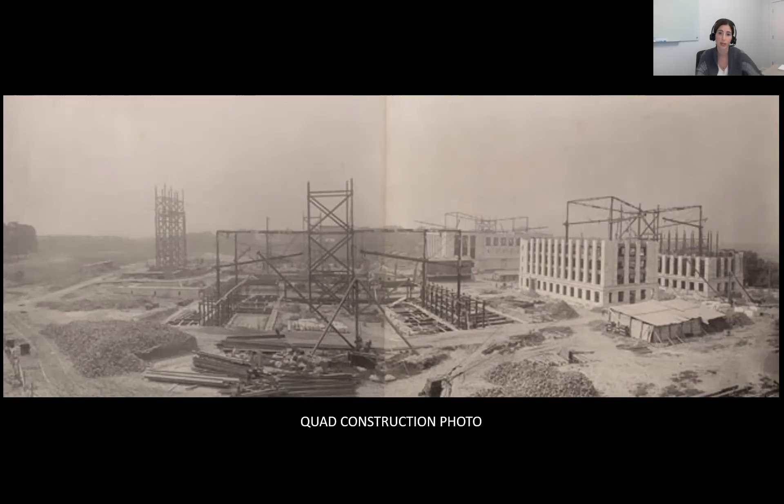All 5 buildings consist of thick marble and brick masonry exterior bearing walls, with steel frame that you can see in these images as the interior makeup. So the steel framing is supported on exterior steel columns as well that are clad in brick, and then the final cladding is marble. The stone cladding is a Vermont marble of the Dorset Plateau Quarry, and that will be of interest in coming slides.

So Gordon Hall is the flagship building at the head of the quad. The building has large porticos on the north and south elevations, each supported by 6 large marble-clad columns. The buildings were originally designed with exposed brick facades, but the story that's been passed down in the history of the building is that the contractors on this job were the same contractors working at the New York Public Library. And the marble that was being quarried in Vermont was coming to New York in such a variety in color and texture that the New York Public Library were rejecting most of the stones, and stockpiles of stone were just being left and not being used.

So the contractors who were building Gordon Hall and the other buildings around the quadrangle at the same time suggested to Shepley's team that they should consider changing up their design and cladding the buildings in marble since they had all of this excess stone. And they did a last minute design change from a brick exterior to a stone cladding. And today that varied color is a trademark of the buildings loved by its patrons and the surrounding community.

So our project began when the medical school invited McGinley Kalsow & Associates to do a facade assessment of Gordon Hall as they were finding areas of stone damage, cracking, spalling, and staining around different areas of the building. The architects called in us, Silman, to perform structural investigations on isolated facade conditions that appeared to be structural in nature. So they wanted our opinion on what we thought was going wrong and how best to fix them.

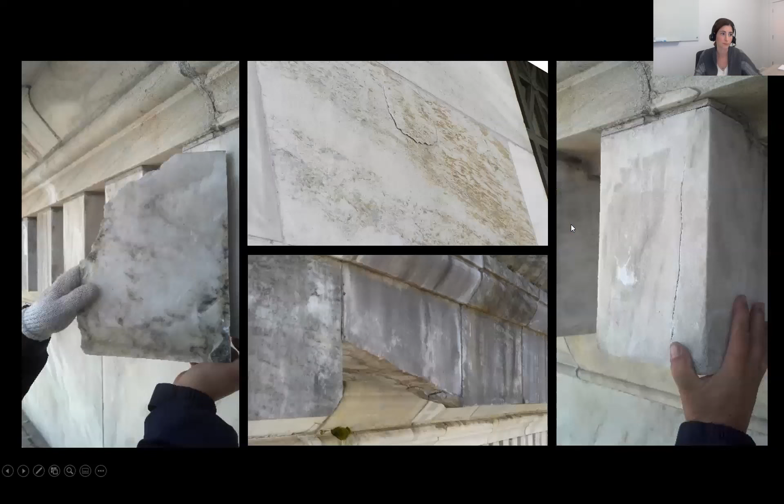So up close review of other areas revealed fractures, spalls, and cracking, mostly at the decorative projections, the cornice lines, the dentils beneath the cornice, and the parapets. We worked with Chalmette Construction to remove large areas of imminent spalls while on the lift. Entire horizontal sections of dentils and cornice sections were able to be removed. Removal of some small spalls revealed the presence of rusted stone anchors or cramps that were installed too close to the exterior. Other areas showed spalls aligning with the inherent veining in the stonework and avenues where the stone was most susceptible to freeze thaw.

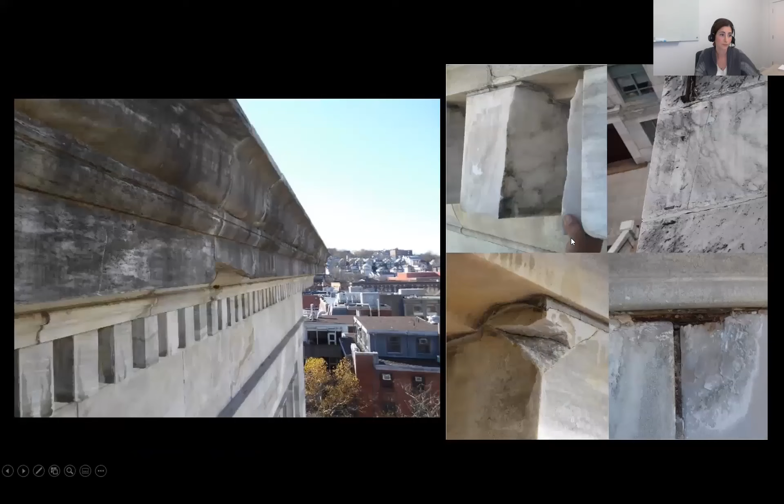Here are more conditions we saw up close via a lift. So you could see some exposed steel elements were clearly rusted in close proximity to the exterior edge of the stone, and that was building up some pressures behind the stone, causing cracks that we saw at vertical jointing and horizontal projections.

The next area we focused on were the column volutes. So the 6 north and south column capitals are decorative ionic scrolls, also known as volutes, and they're made of solid marble. They support large entablature elements spanning between the columns. The columns support the entablatures and the roof, decorative cornice, and parapet overhead. Because of this stacked construction, a significant amount of load is going to these columns.

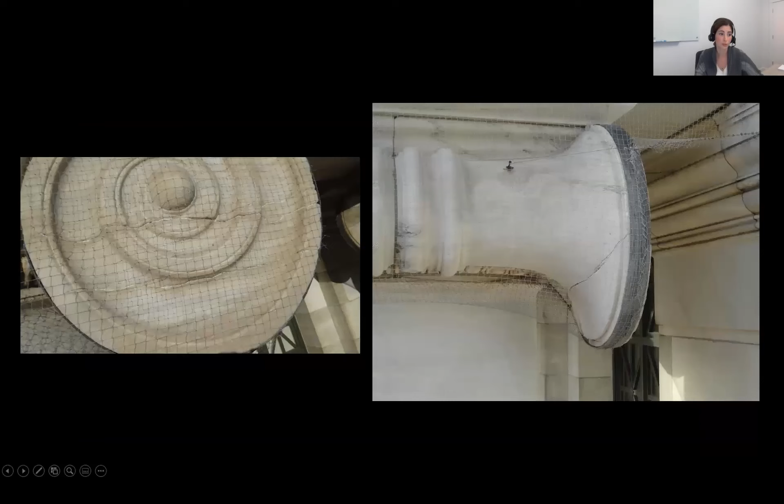Extensive cracking was seen over and between every column. Close-up review showed that most of the volutes were already patched with a buff color and netted. Even closer review showed large cracking through significant chunks of the volutes, probably why the netting was installed. But also you could see around the decorative elements of the volutes were these metal straps that were installed at some point in the building's history. And those were a means of an additional reinforcement should large scale volute cracking lead to spalling.

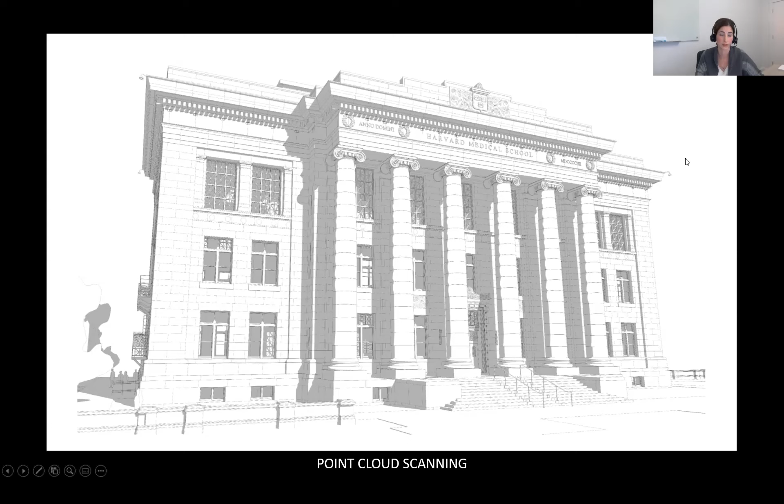So we wanted to begin understanding the scope of repairs that were needed. And so we began with a full documentation of the project. We began by performing a point cloud scanning of the entire building facade. This allowed us to take measure of the baseline current state of the building and allowed us to look at the plumbness of the elements. And also, as we'll see in the next slides, it helped us detail and document the repairs to the decorative features like the volutes.

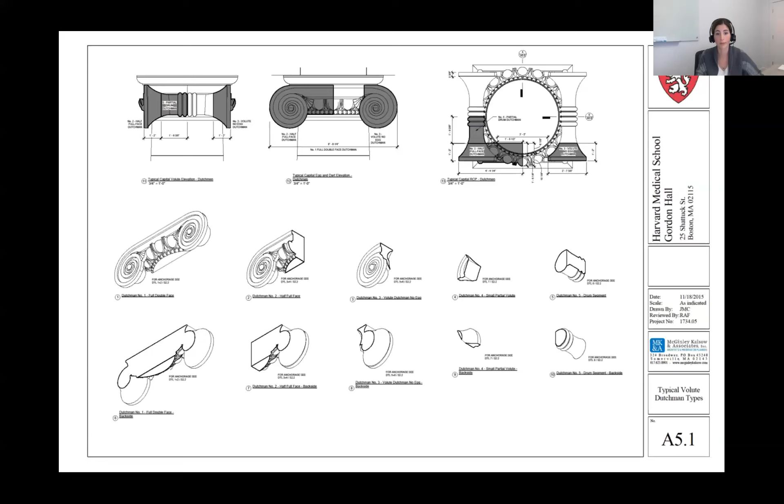From our point cloud and our on-site assessment, we developed drawings to document each column capital as seen on the screen now. We developed itemized drawings to document exactly how much of each column capital needed replacement, and our point cloud model allowed us to illustrate those sections and detail their installation. With these drawings, the stonemasons were able to create mock-ups of repair areas in plaster molds first to recreate a perfect match to the existing elements in their decoration.

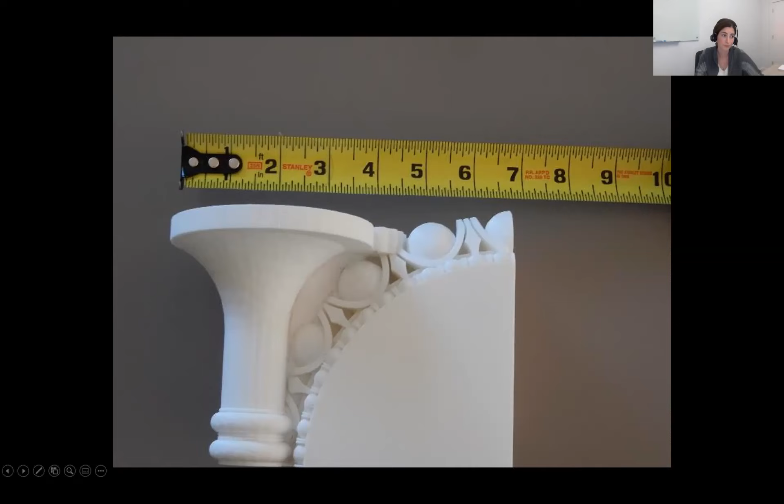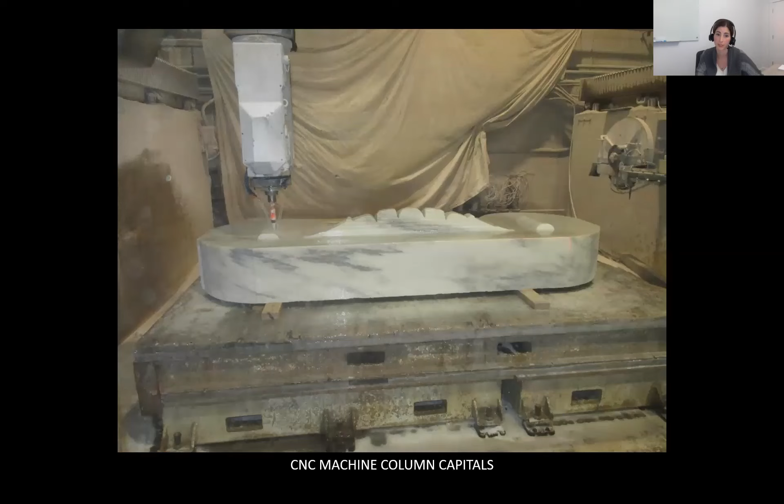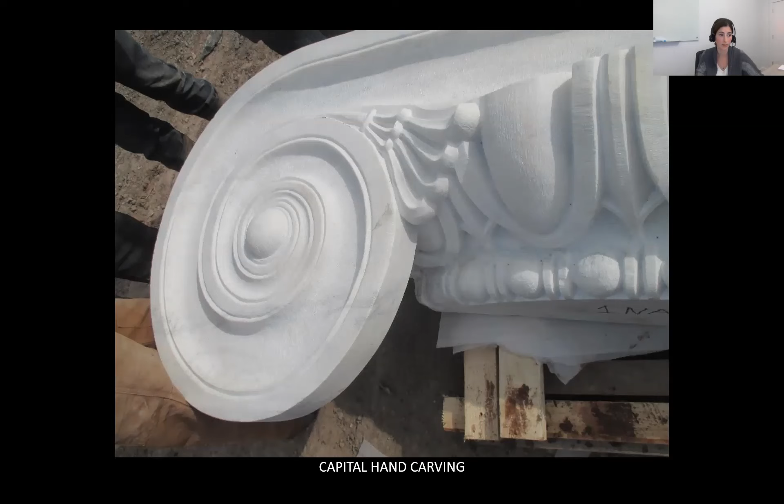The process of recreating sections of the column capitals took place off-site. Giant blocks of marble from a Vermont quarry not too far from where the original stone was taken were cut by means of a water jet blade in the general shapes. From there, a CNC machine began to carve in the decoration. The general shape and decorative projections were machine carved, but once we got to the more intricate detailing, those were done by hand, by skilled masons. And so here are a couple of images of some of the completed decoration.

So now back to the metal straps. The school believed that these straps were put in very early in the building's history. And given this information and the load that we calculated coming down onto the decorative elements and onto the columns and the behavior of the stone, we felt that we needed to replace and reinstall these new straps, but the new straps would need to fare better and be more sensitive to the stone's materiality. This would help keep original pieces that only had minor cracks from needing full-on replacement.

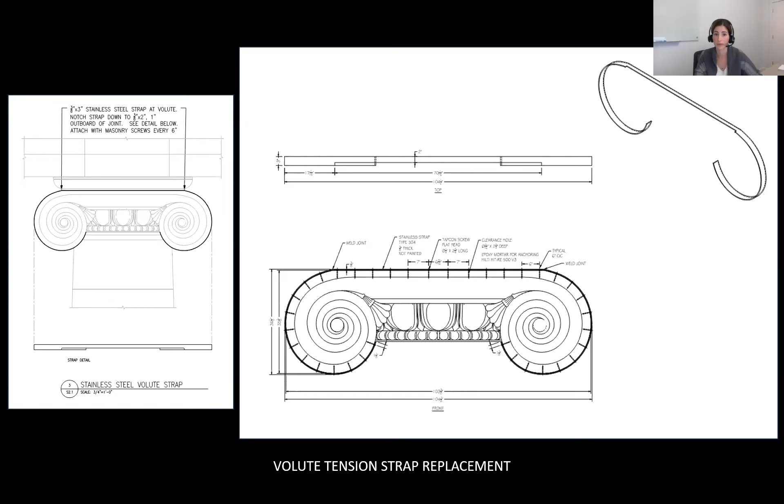So while the original straps were mortared around the volutes only with no mechanical means of anchorage to the base stone, we decided to mechanically anchor the straps back to the main portion of the column in order for it to grab more of the existing structure that was still in place, should it need to be engaged. Our original design used regularly spaced tapcons around the profile, but we soon abandoned that idea to maintain the integrity of the marble. Instead, we mechanically anchored the straps back at their ends by means of an angled plate that receded into the back profile and would be hidden from view. If the stone were to crack and lead to spalling, the straps would fully engage, and it would engage not only the weight of the volute, but the weight of the column behind it and keep everything in place.

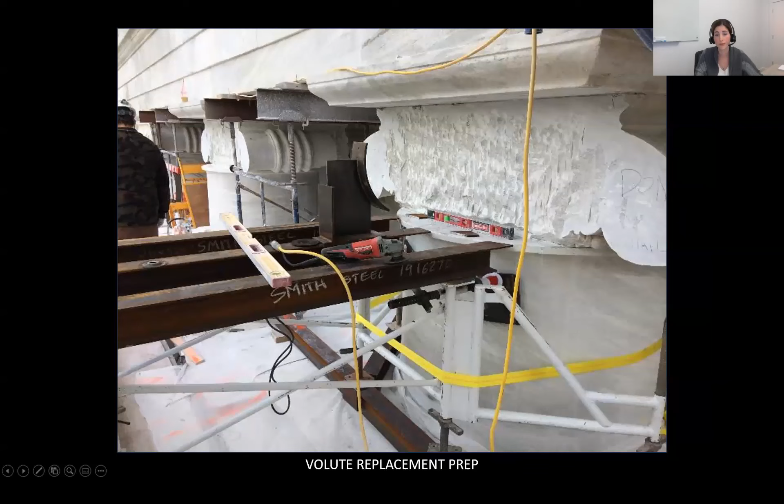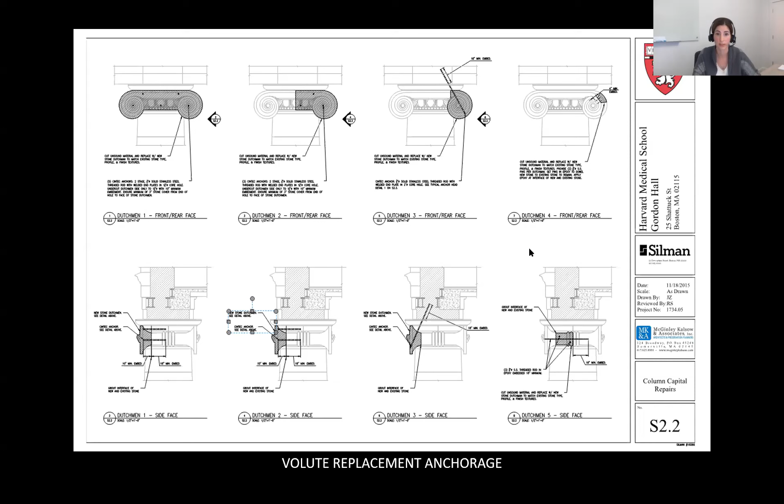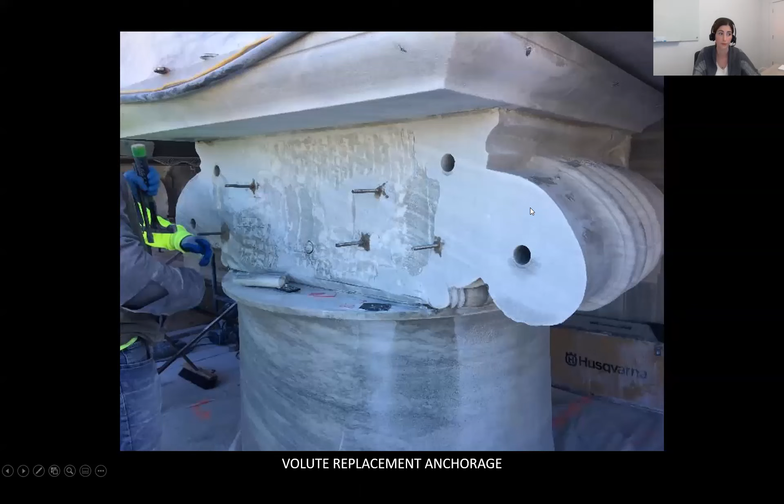Prior to installation, we also conducted on-site Hilti pull tests to make sure that the capacity of the epoxy anchors was suitable for their repair. And here is a finished look.

So the last area where we saw significant marble cracking that could have been indicative of a structural concern was at the entablature soffit pieces that were spanning over the volutes. When we were fixing the column capitals, we noticed that almost every soffit panel was cracked and that there were several large fragments already detached and spalled off.

So we decided to conduct another probe by removing stonework over the entablature stones to understand first, are the stones self-supporting elements? And secondly, is there any backup structure that's aiding or by contrast hurting them? There's minimal existing documentation in this area.

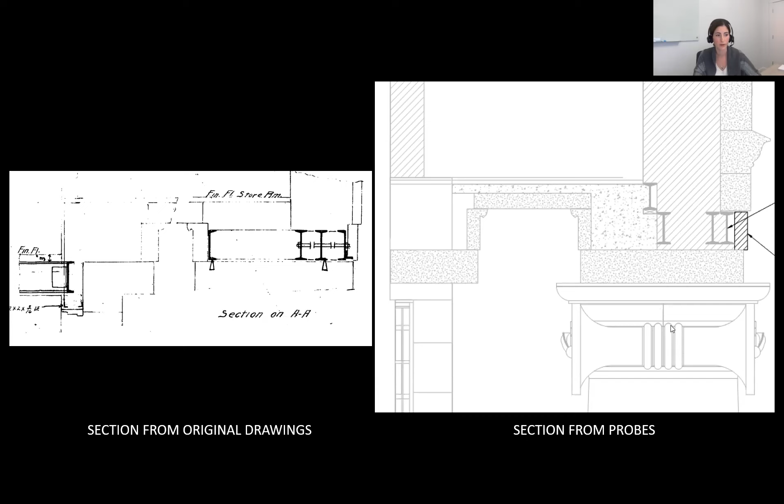The image on the right is from our probe, and you could see our probe in our black hatched area. That's the stone we removed. And it kind of completes the picture and shows that the steel inside is slightly different, and what we found that I'll present in the next pages is slightly different than the original sections.

The probe confirmed that the entablature element was meant to be a self-supporting stone, not meant to hold floor or roof load, but capable of supporting itself. The probe also showed that the spalling was caused by stone anchors. You can see a spall at the corner because we removed it, but there were stone anchors at each of the ends of the entablature that were installed too close to the exterior face of these entablature pieces.

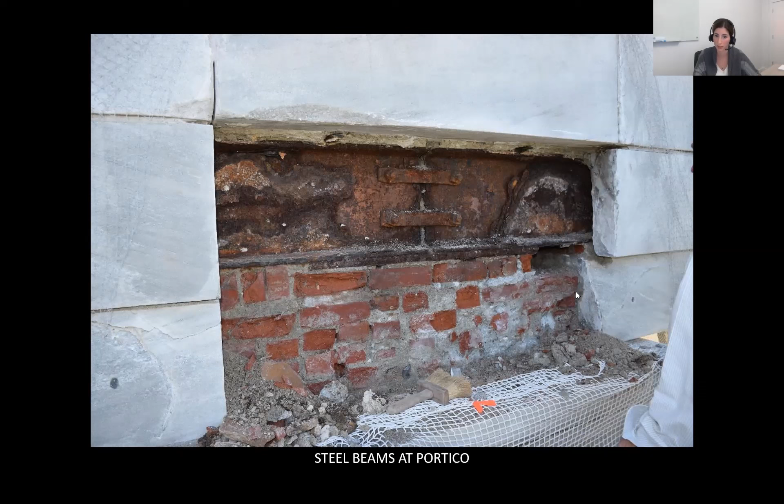And so we believe that the cracking and spalling of the entablatures was not a structural condition, because we ran calculations to prove that the entablature could span and support itself. But rather we found that these were just another installation deficiency, in that the metal anchors meant to keep the stones from differentially moving from stones above and to the side of it were installed too close to the face of the stone, and water got into them and corroded them and started building that internal pressure that wanted to break and crack the stonework.

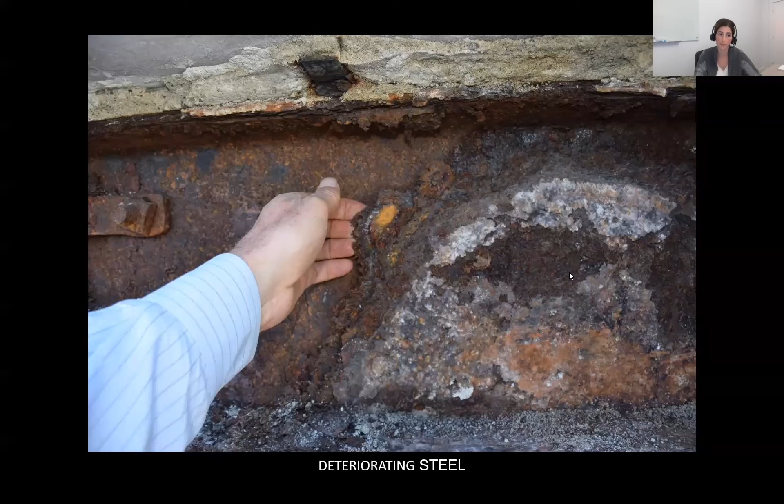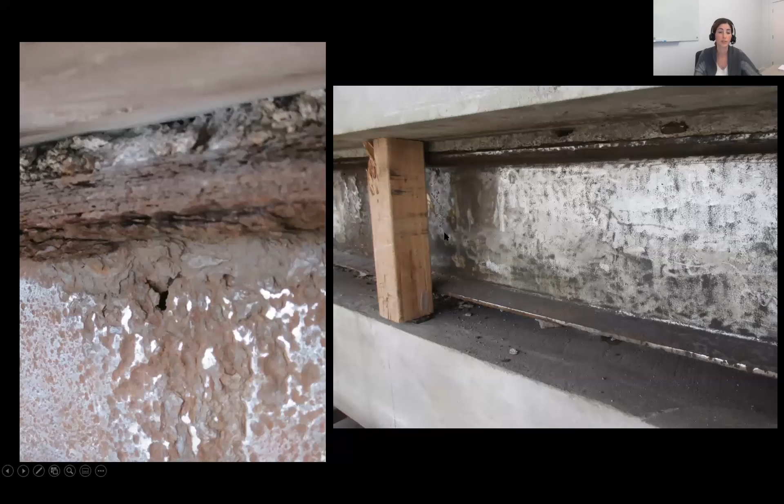The larger structural concern we found when we probed was the extent of steel corrosion at these steel lintels meant to hold up the roof and the parapet of the portico. The steel was significantly rusted, with large and continuous areas of pack rusting, and some areas of complete section loss that you could see where there's a hole through the web on the image on the left. The contractor needed to clean the steel so that accurate measurements could be taken.

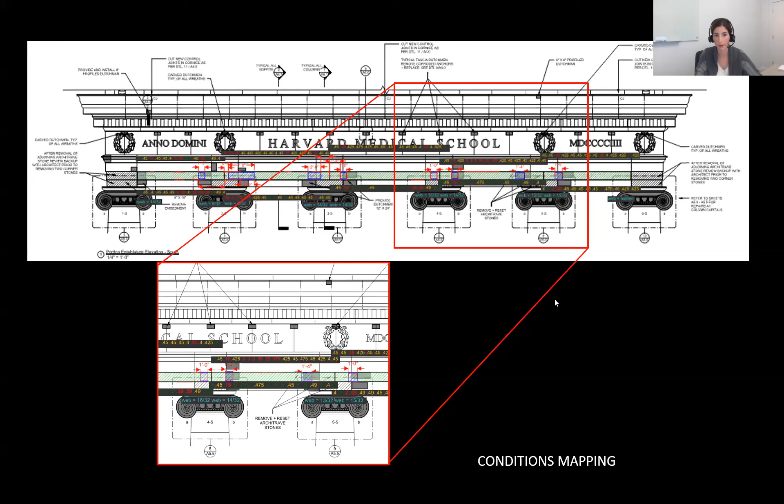So that helped inform our repairs and our detailing, which was a plating scheme that we performed on site, because we felt that we could achieve the repair on site without removing and replacing these pieces of steel. Because removing or replacing these pieces of steel would have been a larger constructability issue and shoring problem. And we did everything in situ.

But the larger problem that we had was that these steel lintels are in an exposed condition. They have stone in front of them and masonry around them, but water's still going to always get to them. They're not in an interior condition. So what do we do with the level of moisture that's going to continually come in behind the stonework and attack the steel, even after we repair them? We were working with the architects to install new flashing, which would divert a majority of that water, but this area would not be 100% waterproof.

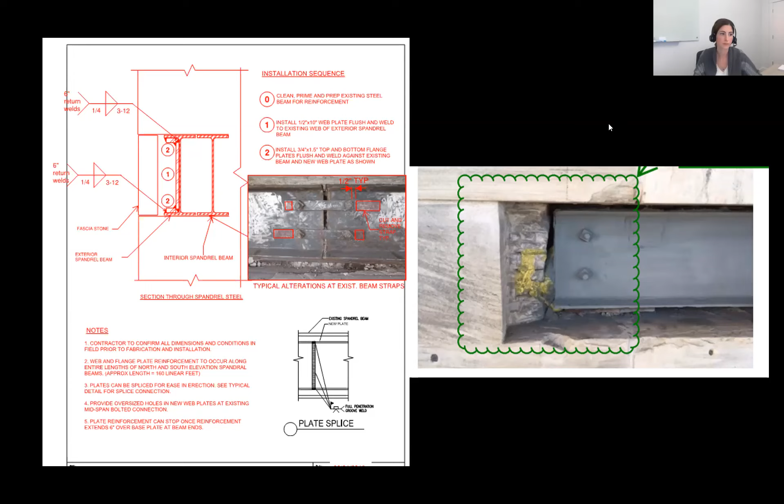So after sorting through our options, we, with the support of the Harvard Medical School, decided to install a cathodic protection system as the long-term protection of the steel lintels. The type of system used was an impressed current cathodic protection system.

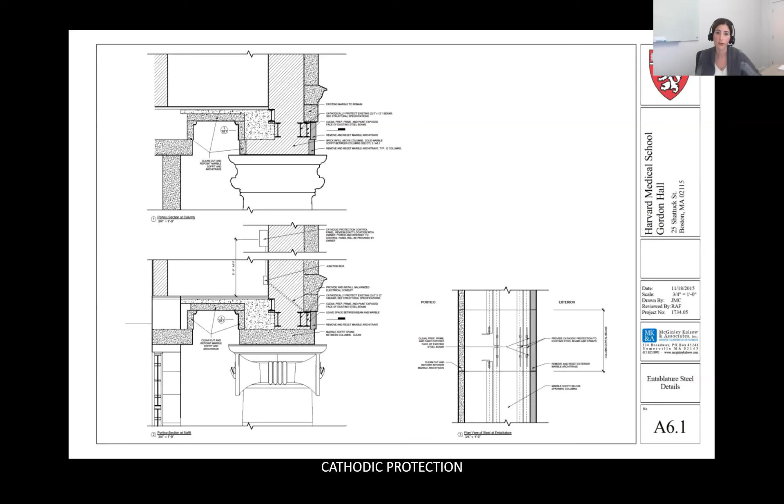In this system, anodes are installed within the masonry backup and wired directly to a direct current power source, diverting the corrosivity away from the steel lintels to the sacrificial anode. So in the presence of water, the anodes would corrode instead of our steel lintels.

For our project, a conductive metal mesh ribbon was embedded in a mortar joint sitting on the steel lintel bottom flange to serve as a permanent anode. A rectifier that converts ordinary line power to low voltage DC, to a direct current, was located in the attic of Gordon Hall and still serves as the power source for this system today.

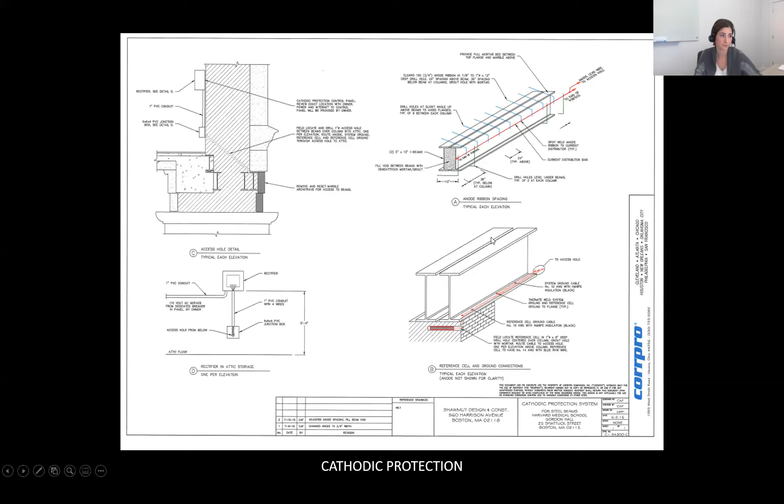So what did we learn from Gordon Hall to be used elsewhere? Locally, we took what we applied at Gordon Hall and used it at the other 4 buildings, because we were seeing that Gordon Hall was one of 5 identical buildings built around this quad at the same time. These buildings appeared to all be suffering from the same moisture and infiltration issues around the stonework exhibited by cracking seen at Gordon Hall. So the phased approach of visual assessment, probing, and testing that we completed at Gordon Hall, we did at the next set of buildings around the campus.

We found with our probing and our testing that a lot of the concerns we saw with the stone cracking and spalling were due to detailing issues with thin profiles of stone together with metal attachment points that were too close to the surface. That, together with moisture, led to the damages that we saw on the exterior at all of these buildings.

So, what can we take away from this story? Namely, that the original detailing of the buildings were changed from a brick facade to a stone cladding, and a more in-depth understanding of the cladding materials and their behavior in an exposed environment, together with proper detailing in terms of their thickness, anchorage, profile, and how recessed the anchorage needs to be from the exterior, would have alleviated the conditions that ultimately required repair at these buildings.

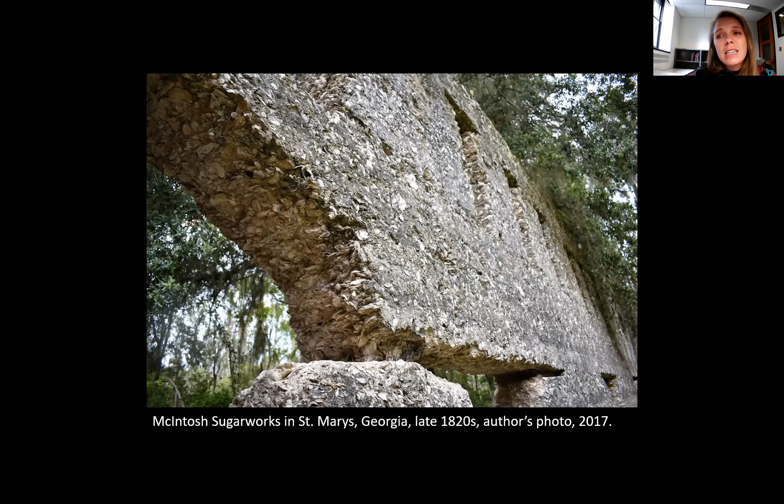Enslaved workers spent a significant portion of their working time collecting oyster shells and acquiring the necessary heat to burn them for lime. The construction process, too, was challenging and involved building substantive wooden formwork into which the tabby mixture was poured. Each layer had to solidify before another could be added. And since the material was thick and chunky, builders relied on its large mass and weight to keep together.

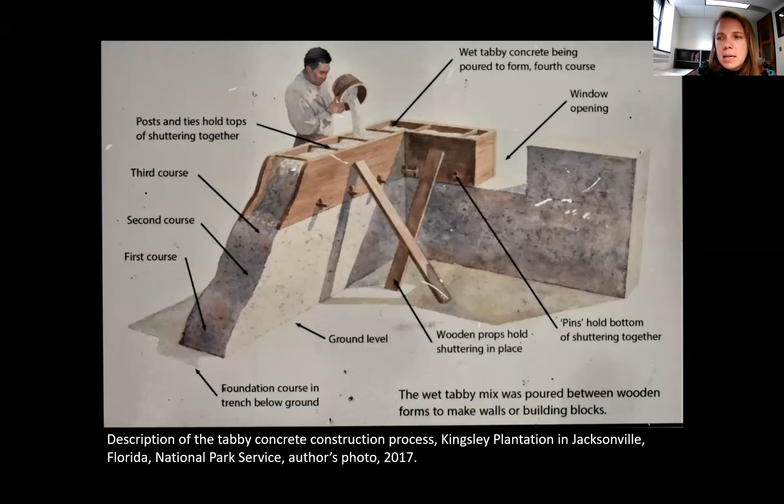When poured to construct agricultural buildings or slave dwellings, the partially burned shells exposed their sharp edges, presenting a cold and unwelcoming surface ready to scrape and injure unsuspecting passersby. Although tabby concrete was limited geographically to states bordering key waterways, it nevertheless left a meaningful impact on the local building cultures.

Tabby manufacture and construction was quite different from other construction methods, instead closely resembling domestic forms of farm labor. From scavenging and collecting oyster shells, to their burning and mixing with water and other ingredients, as well as their pouring into wooden molds, making tabby was not unlike cooking.

Much like enslaved people's maintenance of gardens that carried familiar medicinal plants, tabby too connected them to their African origins. By some estimates, early forms of tabby were brought to Spain by the North African Moors. Similarly, the manufacture of tabby resembled that of mud brick, created by mixing agricultural soil with leftover straw from the grain harvest, further cementing the familiarity of these sibling building traditions.

This early form of concrete therefore existed not in isolation, but as part of a constellation of material linkages that connected enslaved people to their geographical and cultural origins.

The use of tabby in the US South ended with the 1865 passing of the 13th Amendment to the US Constitution, which abolished involuntary servitude and slavery except as punishment for crime. With the end of slavery, building practices likewise changed to accommodate new financial and labor regimes, and concrete came into the picture to facilitate that shift.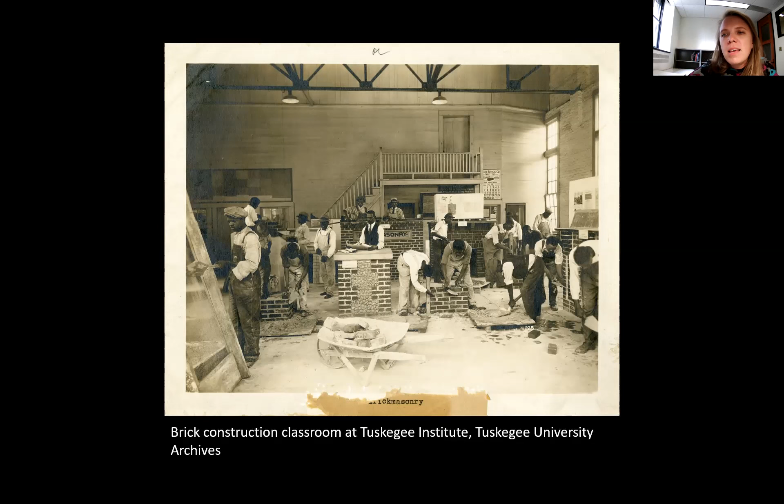The elevated balcony with a door to a private room on the second level most significantly recalled the centrality of the factory overseer, or in the case of the US South, the planter surveilling his fields from the porch of the big house. Closely reading the two classrooms side by side reveals that while Tuskegee students learned about the importance

of concrete for the construction of roads, sidewalks, and foundations, they were not taught to think of it as an especially noble or lucrative material. Indeed, the photograph of the brick masonry classroom was thoughtfully staged to encourage the purchase of locally manufactured brick and labor of Tuskegee students. The image of the concrete classroom, in contrast, sent a different message.

With its repurposed classroom and low-tech tools like containers and shovels, the photograph communicated that concrete was accessible to every farmer interested in utilizing this medium.

Furthermore, building with concrete was not especially complicated and could be performed one step at a time with the help of family members or close neighbors.

Unlike brick construction, which required an army of laborers, concrete work was significantly less elaborate and even domestic. Indeed, workers could fabricate much of the technology they needed for mixing concrete by utilizing basic household equipment.

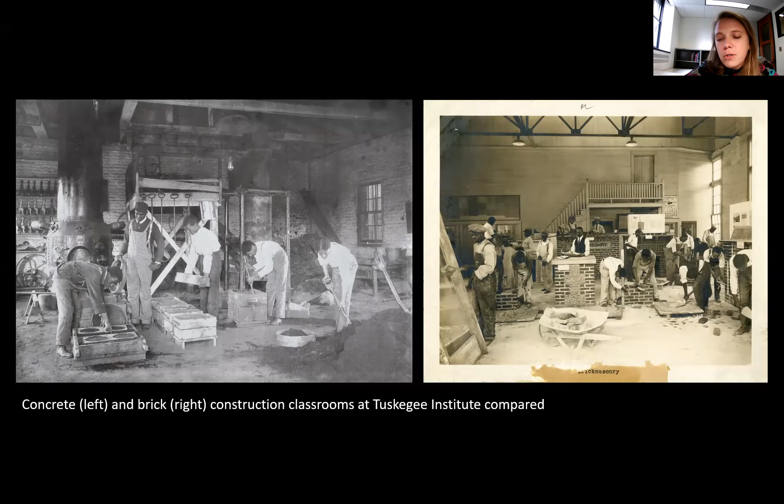One of the most important Tuskegee programs for popularizing concrete among Black farmers was its 1946 development of low cash cost housing. Perfected over a 10-year period, the project was funded with grants from the General Education Board and developed as an effort to provide modern housing facilities for Black farmers.

The first experimental concrete house was built on the campus by Tuskegee students. The project proposed that farmers could erect such structures on their own by utilizing the free labor of their family and locally available materials to manufacture concrete blocks in wintertime.

Tuskegee faculty experimented with various possibilities, building houses of timber, rammed earth, and soil cement mixtures. However, these options were problematic because of high cost and requirements for specialized facilities and skilled construction labor. Program leaders finally settled on concrete, mixed by farmers with largely freely available materials.

Quote: on most of the eroded cotton farms in the South, deposits of sand and gravel can be found in ditches and creek banks. End quote.

So farmers had to purchase cement, of course, at $47 for 50 sacks of cement, which could materialize about 20 blocks per bag. To keep the construction process simple, Tuskegee faculty focused on producing a basic yet well-designed element, the building block, and its formwork.

The formwork was simple and could be built by, quote, one man with crude carpentry skills, end quote. Indeed, project leaders calculated that one farmer could construct enough wooden forms in one day to hold 100 blocks.

He could then mix and pour 10 blocks per hour, and with a month's worth of practice, he could lay 160 blocks in an 8-hour day, or 20 blocks per hour.

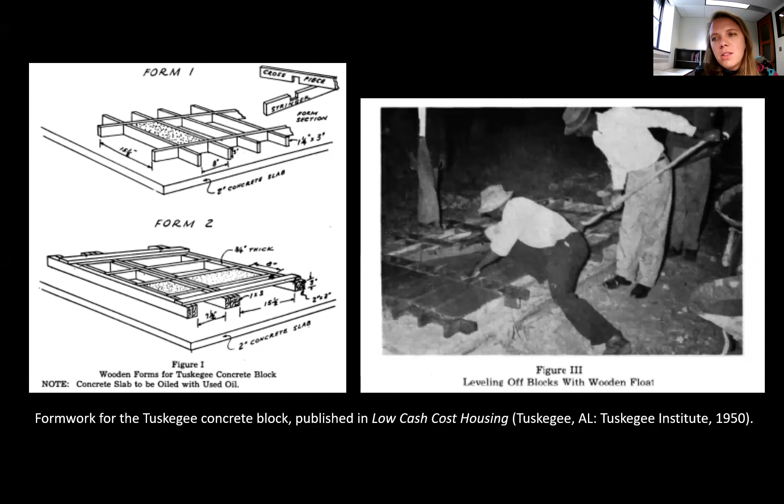Tuskegee's concrete block compared well with commercially available alternatives, yet cost significantly less to manufacture. The only skilled labor that had to be hired was for the laying of the corners, roofing, wiring, plumbing, and chimney building. The project's proposed technique of wall bonding, which included a critical 1½-inch airspace, ensured that the blocks remained thin, cheap, and easy to manufacture, yet produced homes that were sturdy and appropriate for the local climate.

While the concrete low cash cost housing provided an avenue for an affordable and improved life on the farm, it was by no means free. Indeed, while farmers relied on their families for labor and employed locally sourced materials, they still had to accrue debt to cough up the $2,000, or $2.52 per square foot, necessary for the average four-room modern cottage. For many families, these new concrete homes therefore represented years of saving and planning.

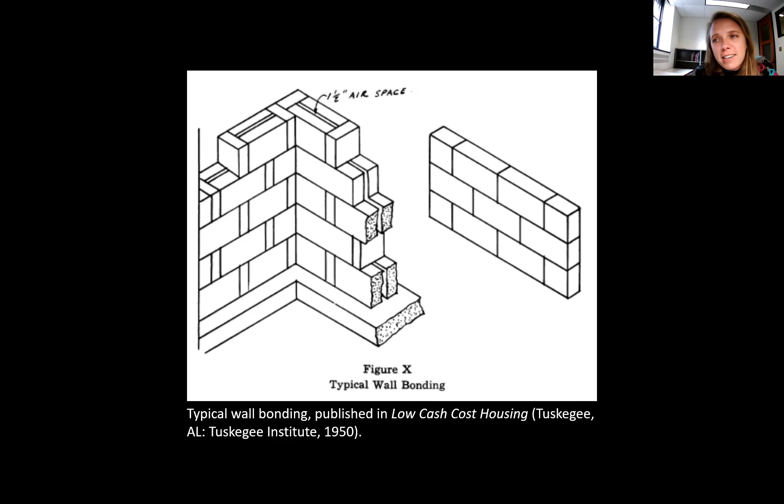And Black farmers were historically used to interpreting visual information. Historian Stephanie Camp has shown that enslaved people half a century earlier decorated their living spaces with abolitionist literature, not because they could read it, but because they interpreted the imagery as a visual representation of the possibilities of freedom. Thanks to the clarity of visual instruction in concrete mixing, farmers could imagine themselves performing this labor and helping their communities embrace this new material of independence.

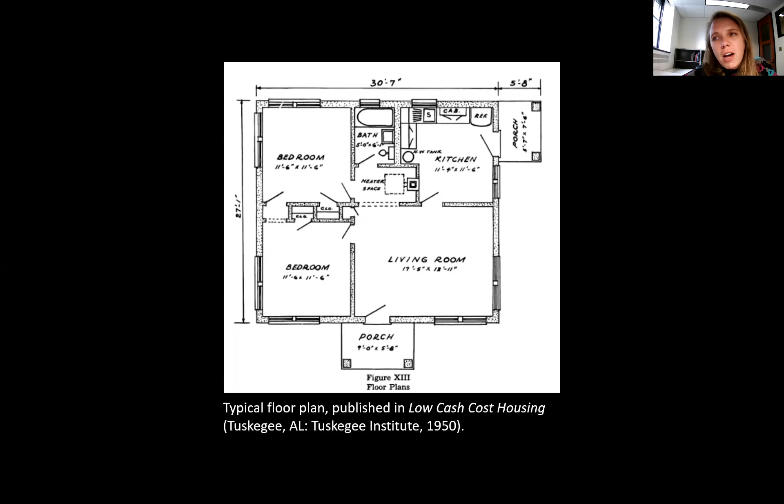As Tuskegee's experiments with concrete block construction expanded opportunities for Black farmers, they also drew local and national media attention. Indeed, the projects attracted not only coverage, but also financial support from white individualist institutions like the Southern Research Foundation. The US Housing and Home Finance Agency also noted that low cash cost housing was not merely an experiment, but an engine for transforming the construction of rural and suburban dwellings in the US South due to concrete's capacity to resist house fires. And the ripple effects of this new mode of rural modernization were felt not only in the US South, but also the global South.

While enthusiasm for low cash cost housing was rampant, the building system did not become as widespread as initially imagined. Nevertheless, this moment in construction history presents an opportunity to consider what a disinvestment from oppressive labor regimes might look like and what it might mean to think about freedom as a place.

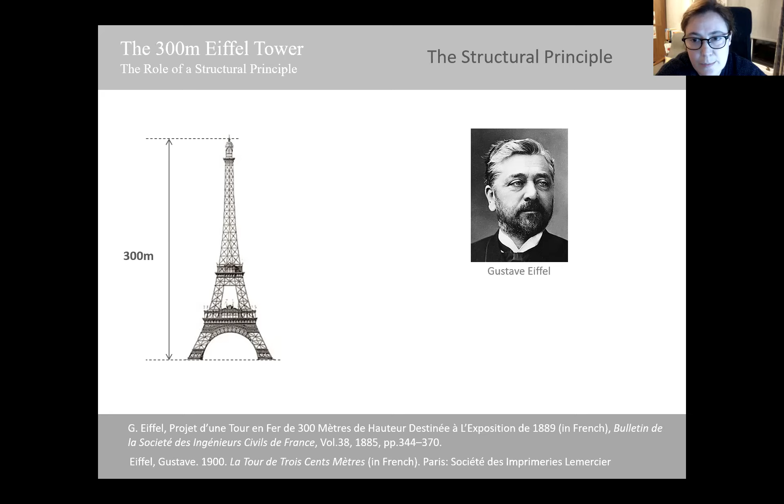So Gustave Eiffel had a number of challenges in convincing the public, engineers and politicians that the tower was feasible. And one of the most important ones was demonstrating that the tower could resist wind loads because of its height at 300 meters tall. It was 2 times the tallest building that had ever been built, which was the Washington Monument previously. And the second challenge that Eiffel had was to persuade people that it was a suitable addition to Paris, because Paris was then the center of the Beaux-Arts movement.

Eiffel's approach to this was to link the technical issue of supporting the wind load to the aesthetic of the design by stating that the unusual curve of the tower was determined by the wind loads acting on it to effectively resist them.

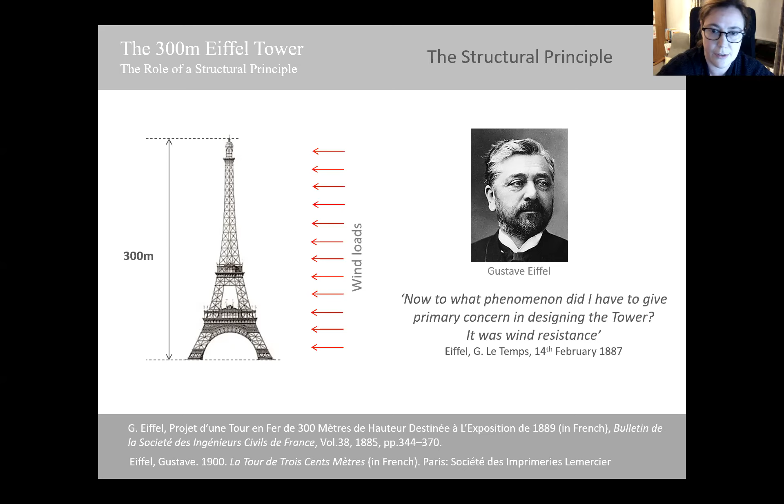Eiffel, in his initial promotional presentation in 1885, which was to the French Society of Civil Engineers, set out this structural principle, and he set it out again in the final publication he made on the tower in 1900. This publication was 11 years after the tower was constructed, and he wrote it principally in order to stop it from being pulled down. So this structural principle runs all the way through the design process of the tower. It doesn't ever change, so it's seemingly a kind of constant throughout the tower's design and construction.

And I'm going to try and explain the structural principle to you, and in order to understand it, I'm going to start with a very basic vertical truss experiencing a horizontal or wind load. Here you can see on this truss, you've got some vertical elements and some horizontal elements, and they're connected together by connections that can rotate. So that means that when the wind load is applied, the structure collapses, or what's called racks.

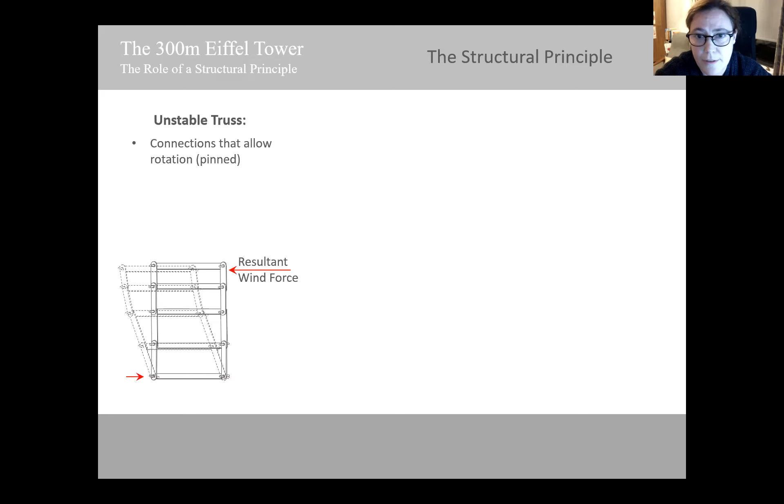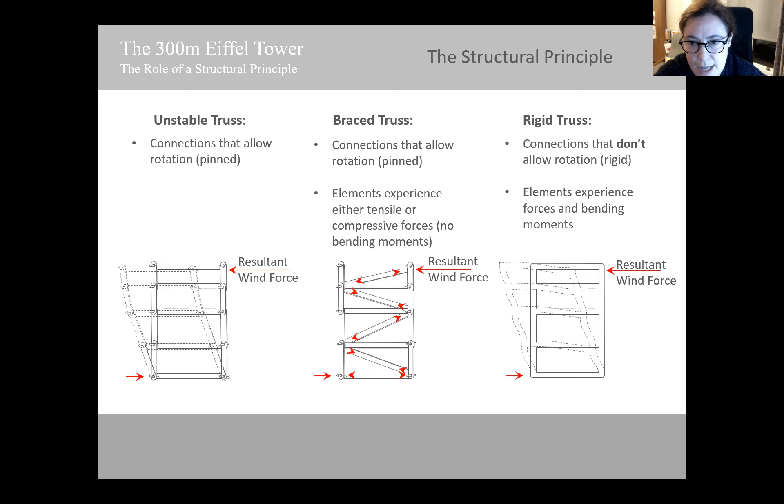Obviously, we don't want that to happen to any structure, and the options to prevent it from happening are firstly what's called a braced truss, where you include braces or diagonals in between the vertical and horizontal elements to prevent the racking. And the second is to have what's called a rigid truss, where you make the connections between the horizontal and vertical elements strong enough, rigid enough to stop the rotation happening. So you create what are called rigid connections.

So Eiffel describes the principle in the two publications that I've cited. And basically what he's saying is that in order to remove the need to have bracing or diagonal bars, you can give a curvature to what he's calling the uprights, and the uprights are the elements that perhaps were once vertical but have now been inclined at an angle.

And he's saying that if you take a section through these uprights at a certain point, so if we take a line between M and N, then the tangent to the curve of these uprights at that point should intersect with the resultant of the wind force that acts on the surface area of the truss above the section line MN. So it's quite a complicated principle, but basically what this means is the uprights act as both the elements that take the vertical loads down to the ground, but they also act as the braces because they're angled.

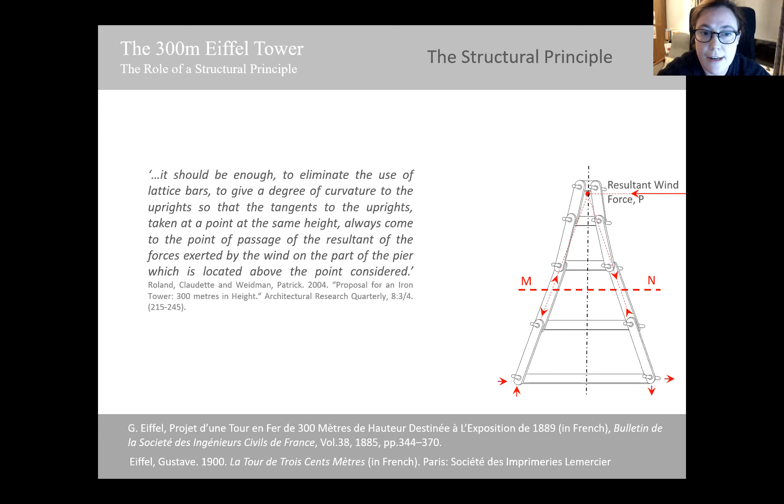So this is Eiffel's notion of efficiency. He's reducing the need to have additional braces as you might have in a typical braced truss. The reason for the intersection of the resultant wind load and the tangent of the legs at points up the tower ensures that all the elements only carry tension and compression, and they don't go into bending. Tension and compression are much more efficient ways of carrying load. And so in this way also, Eiffel was ensuring through this principle, he proposed an efficient structure to carry these wind loads down to the ground.

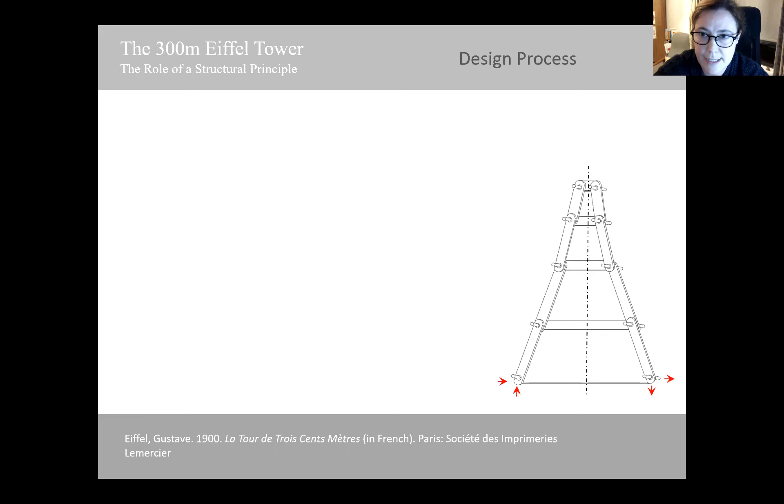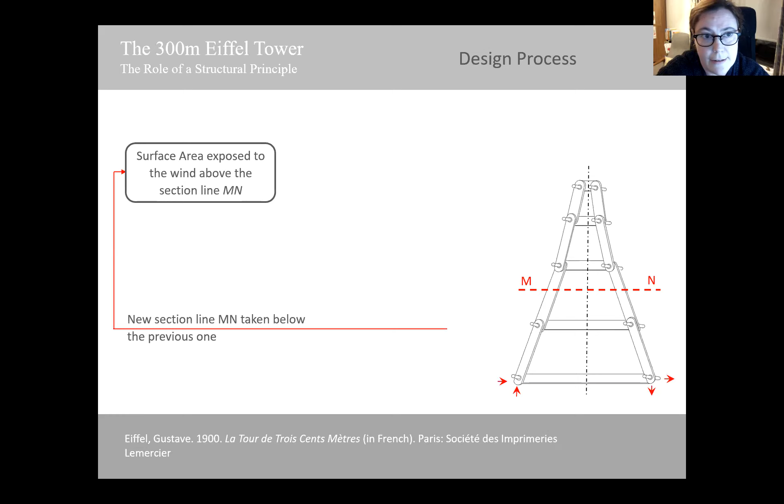In practice, what this means, and this isn't noted by Eiffel anywhere or indeed by his engineers, is that you've got to start your design at the top of the tower and gradually work your way down, taking sections through the tower, getting lower and lower. So if we start with the section line MN, what we need to then do is define the surface area of the tower that is going to be interacting with the wind loads above the line MN. And we need to multiply that by the wind pressure above the section line MN to get our forces, and any safety factors that you want to include. And that will help us determine the location of the resultant wind force above the section line MN.

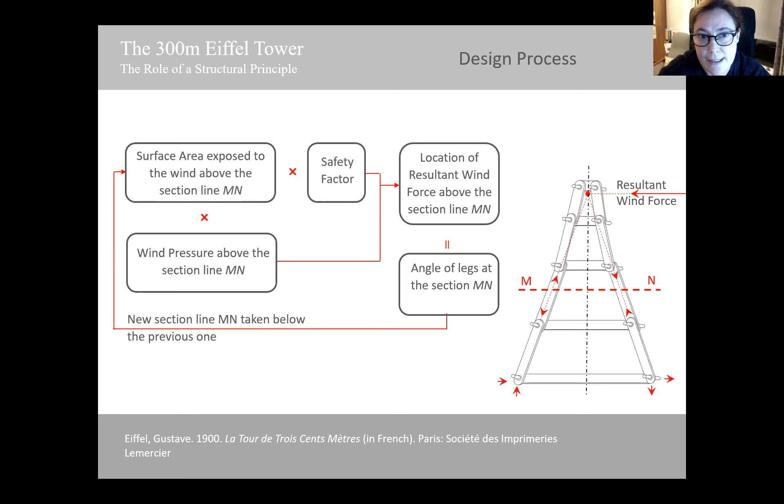This in turn is going to define for us the tangent of the angle of the legs at this section line. And if we take that just a step further, those tangents are going to define the surface area above the next section line that comes below it. So the tangent lines are, if you like, defining the shape of the tower above the point that you're considering. And so it's a cyclical design process where you have to work your way down the tower to generate, if you like, the shape of the tower in response to the position of the resultant wind loads that you're getting at each position that you consider.

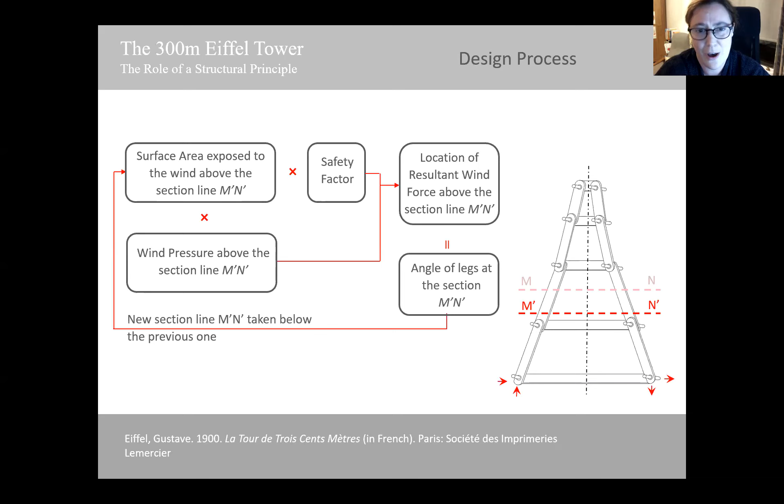This is a complex process, and I'll talk a little bit about why it's important to understand what this principle actually means in terms of the design process. Hopefully you can see that it really is a principle that has to control the whole design process of the tower in order for it to work. Hopefully it's obvious that Eiffel's structural principle then needs the knowledge of the wind pressure up at the height of the tower, 300 meters, and also how the wind would interact with the tower. It's interesting to point out that it's an open latticework, which is very different from buildings that preceded it. Typically, like the Washington Monument, you've got a solid brick surface that was catching the wind. This is very, very different.

And Eiffel admits to the French Society of Civil Engineers in 1885 that he, A, doesn't know how big the effects of the wind will be, and he doesn't know how the wind is going to interact with the tower. Now, to be fair to Eiffel, this is because nobody could reach 300 meters to measure the wind pressure or the interaction with different types of surfaces at this height. So it's not because Eiffel's not on top of his subject, it's because of the timing and the advances of technology at that point in time. But this statement raises a really important question: if the structural principle is used to define the curve of the tower, how are you going to use it if you don't know how the wind will interact with the tower?

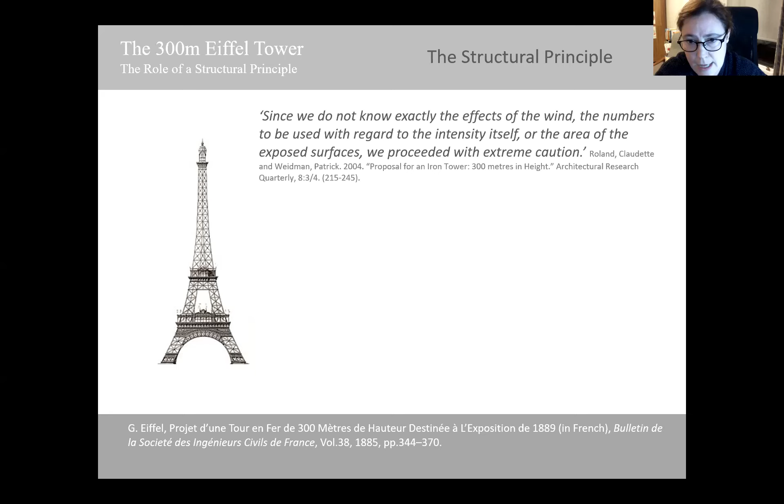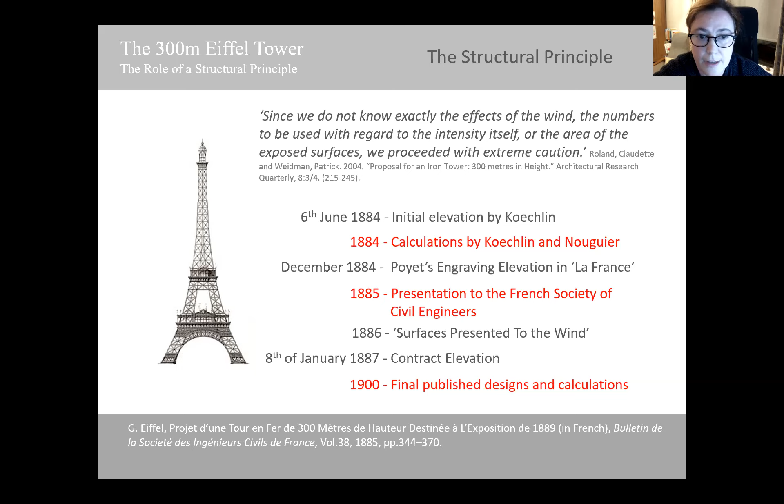And in order to answer that question, I located the existing documents that could help detail the use of the structural principle during the design of the Eiffel Tower. These are listed here, and they include published elevations of the tower as well as structural calculations that have been preserved over time. These sit between the initial proposal for the tower in 1884, its completion, and its final design, which was documented in Eiffel's final publication in 1900.

To underline the lack of knowledge about the wind loads in this period, the calculations between 1884 and 1900 showed three different wind pressure distributions were considered. The first, case 1, varies from 200 kilos per meter squared to 400 kilos per meter squared. The second one is a uniform wind distribution of 300 kilos per meter squared all the way up the tower. So this is the height of the tower going up to 300 meters at the top. And the third case is a uniform wind distribution of 400 kilos per meter squared.

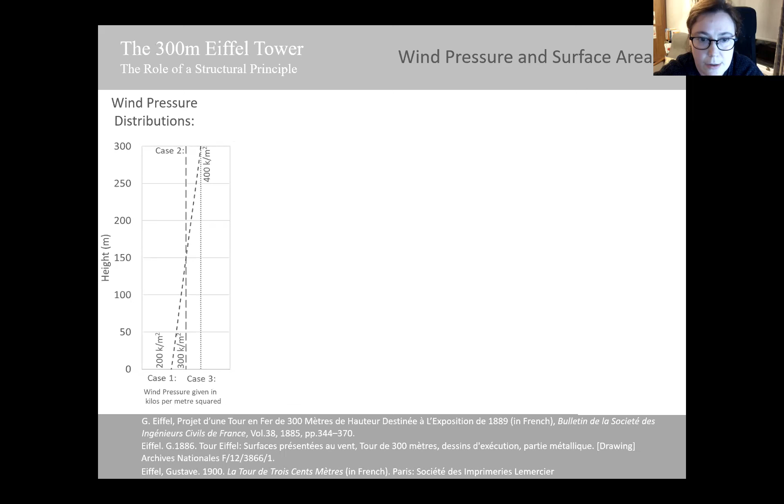Also, you can see a variation in the way in which the surface area is being defined at the tower. So this is about the interaction of the wind with the surface of the open lattice work. You can see here that areas that once were assumed to be a solid area that would catch the wind have now been converted into a much more detailed understanding of individual surfaces within the truss area.

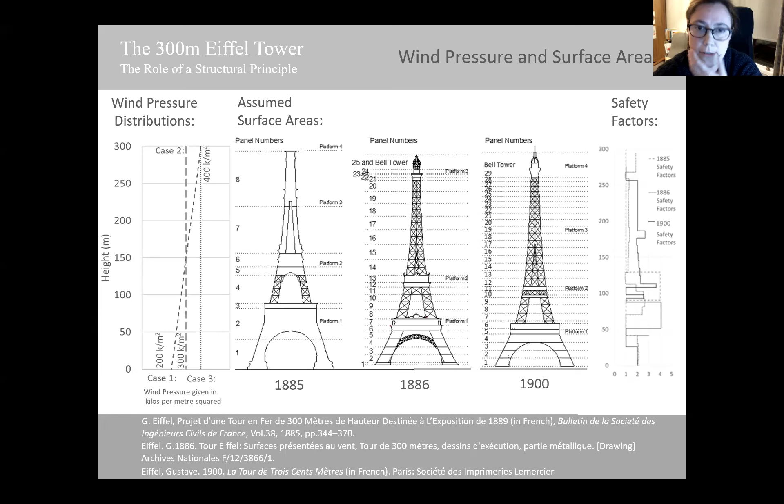And also, finally, you can see hopefully from this graph a variation of safety factors during that period too, with very little indication from the documents as to why those safety factors were changing. The initial proposal for the 300-meter tower was made by an engineer in Gustav's company called Maurice Koechlin. And this is what's thought to be the first drawing ever made of the tower, from 1884.

The drawing shows fundamentally a piece of engineering, and there's very little ornament or decoration going on. But what is worthwhile pointing out is you can see the curved uprights and the horizontal trusses connecting with no kind of bracing between the levels. You've just got connections between the uprights and the horizontals. So it's encouraging to think this is why the structural principle is needed.

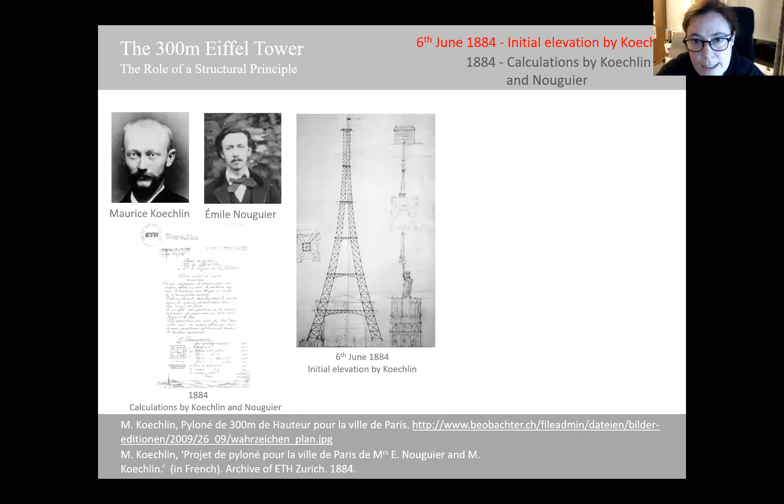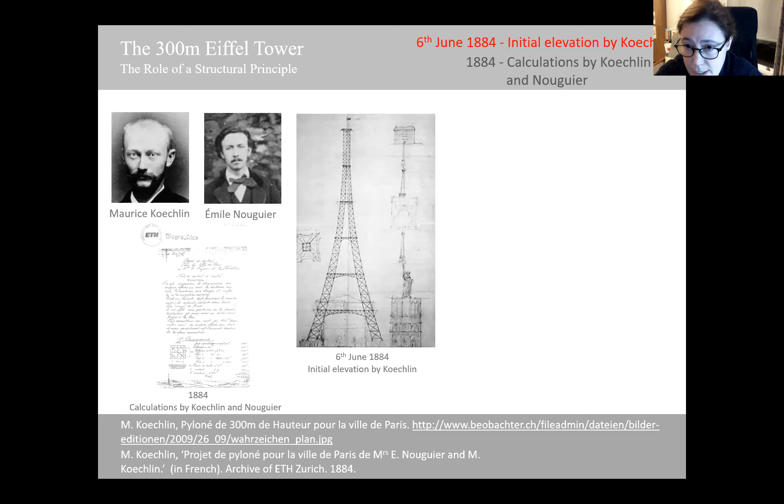Later in this year, we have preserved in ETH Zurich's archives some calculations which are by Koechlin, but also his colleague Émile Nouguier, which are looking at the loading on the tower. And they take into consideration a particular wind loading case, which is the uniform 400 kilos per meter squared. However, these calculations, when you look through them, actually don't adhere to the structural principle that Eiffel published. They don't demonstrate that it's been used at all.

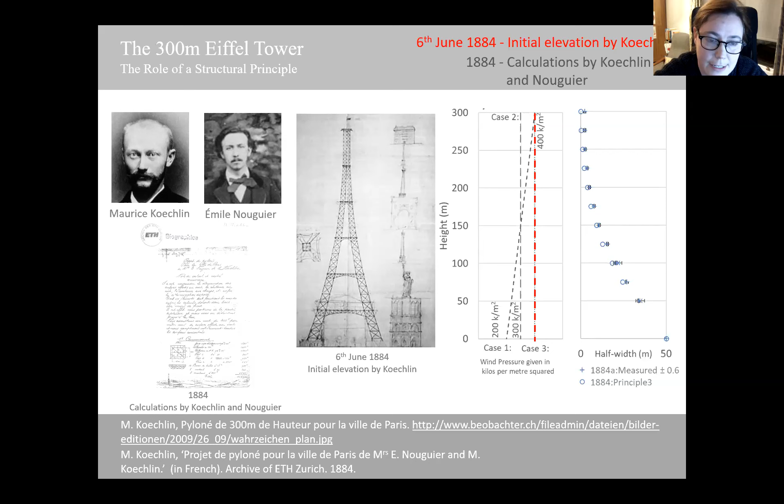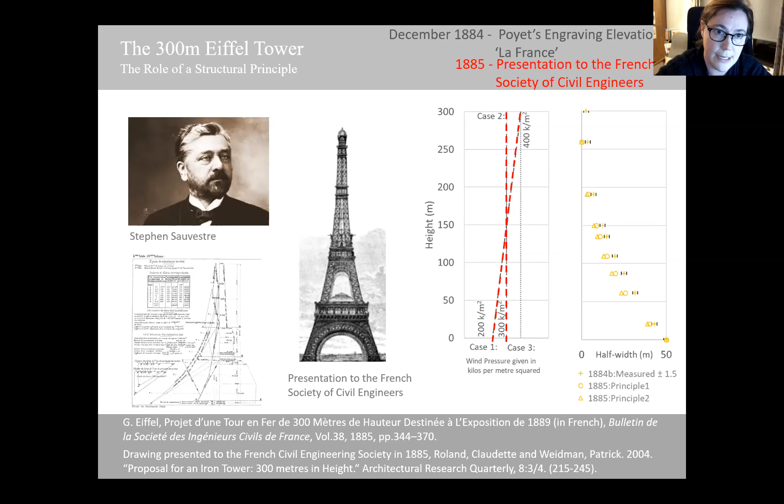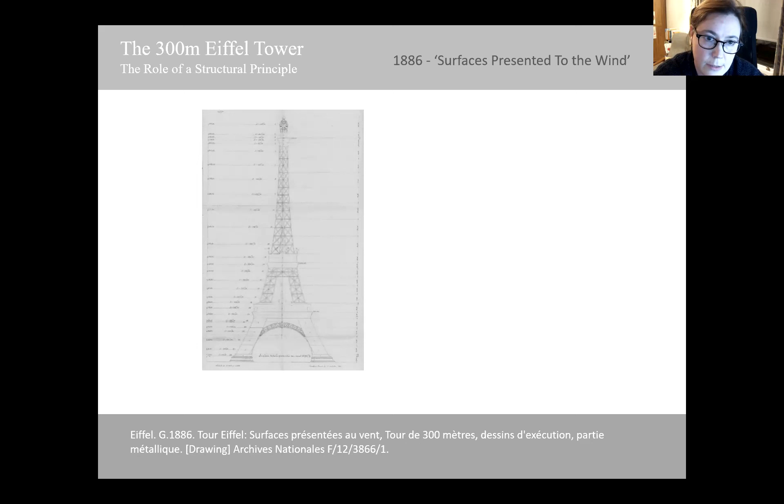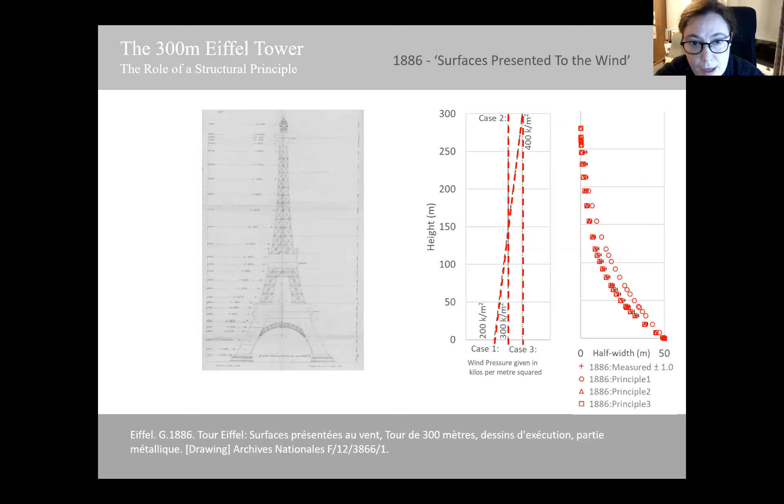What I also did, as before, was measure the profile of this elevation and convert that into another set of data on this graph, shown as the little red crosses. Hopefully you can see that the measured profile matches up very nicely with the profile generated through the structural principle for the uniform loading cases.

In January 1887, Eiffel signed the contract to start the tower's construction. The discussions about the contract had gone on for a very long time, so it was actually whilst the foundations were being built that the contract was signed. The following elevation is part of the contract, an image of what they're hoping will be built, or agreeing will be built.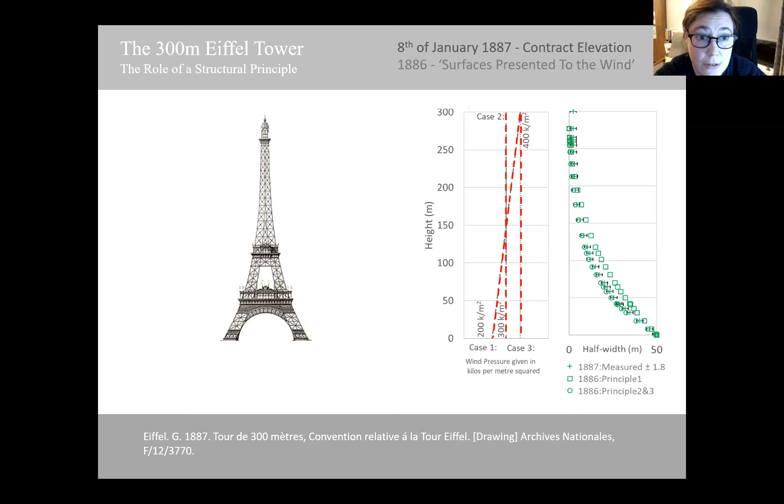The Eiffel Tower is supposed to be a temporary structure, and in the 1900s people were starting to discuss taking it down. Eiffel's response was to publish what he described as the final design of the tower, complete with the description of the structural principle I'm talking about, construction drawings, and structural calculations.

What's really interesting about the structural calculations is that rather than show how the structural principle was used to define the curve of the tower, the calculations showed the difference between the actual designed profile of the tower and the profile that should have been generated by the structural principle. They show how structurally they've had to adjust for this in order to ensure the structural integrity of the tower. So there's a very obvious admission that the principle isn't generating the final profile of the tower.

In fact, if you look at the final elevation in this book, you can kind of see why, because the upper part of the tower is effectively a braced truss. If you think back to Koechlin's initial design, you had gaps between the horizontal trusses and the uprights. But for the upper part of the truss, this is all filled in with bracing. So effectively this is a braced truss, and there's no need for using the structural principle to make this stand up. If you look at the calculations, they are designing a braced truss.

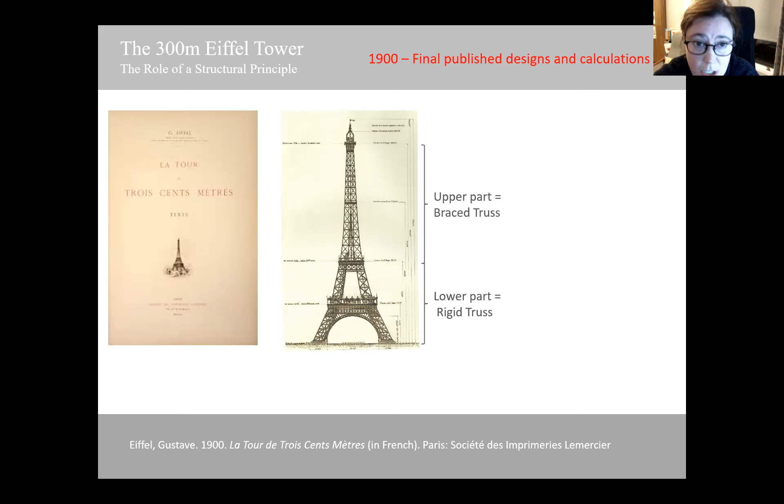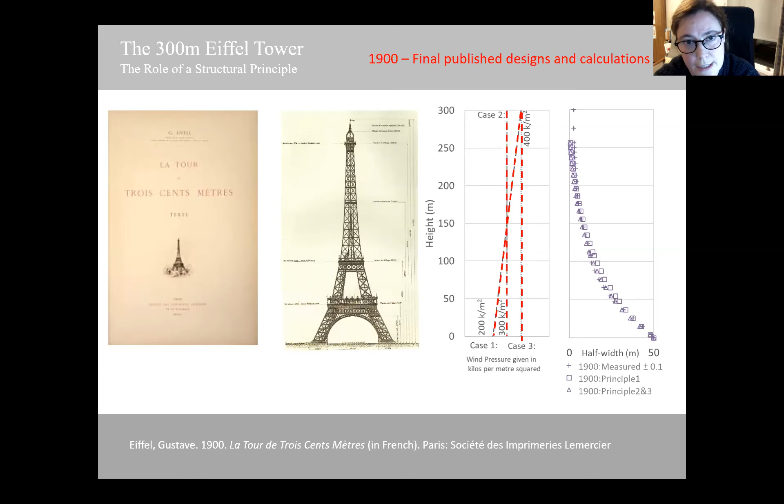So taking the final tower's profile and measuring it again, comparing it against what should have come out of the structural principle for all three loading cases, you can see that for the uniform loading cases, principles 2 and 3, it's a pretty good fit. But there are still significant differences, particularly at the top of the tower.

That confirms what Eiffel is doing in some of the calculations he's presenting, by adjusting for the difference between what the shape actually is and what the structural principle is telling us it should be. If we group together all of these elevations that I've shown, hopefully you can see in the graph that...

So initially, the designs you have are very divergent from the aesthetic projections of what the tower should be compared to the structural calculations. Then we have a really strange step change in shape, and the shape actually is very similar between all three periods in the design process here. It doesn't change very much.

There are little differences though, and what that does is it raises the question of why the final design doesn't actually match with the profile based on and generated from the structural principle.

This could well be because of the complex process of generating the profile based on the structural principle. In other words, one change to the surface area in the tower would require a regeneration of the profile below that change using the structural principle.

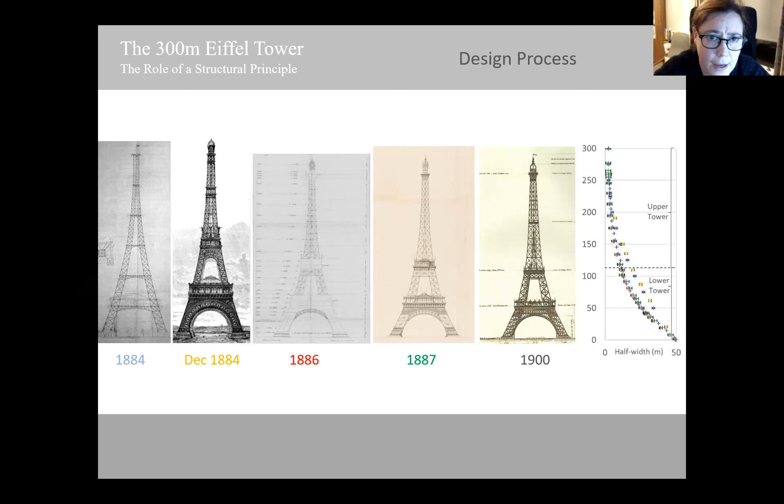So the design development on the tower, on the face of it, tells a story of a struggle between perhaps an aesthetic look of a tower and achieving and realizing this structural principle.

The use of the structural principle seemingly had a lot of control over the design process, but equally there are moments in time where Eiffel uses it as an excuse for the aesthetic of the profile of the tower.

There's a very famous letter written by artists in Paris saying how horrific the tower was and that they didn't want it to be built. And Eiffel, true to form, replies stating this principle, using the structural principle as an excuse for the way the tower looked.

But the reality is that, given the lack of knowledge of wind loads and how they would interact with the tower, the profiles generated on structural principles were massively subjective, because they didn't know the wind loads or how the wind would interact with the tower.

Even more importantly, if the final structural design of the tower published in the 1900s is true, its structure is designed to resist wind loads completely without the need of the structural principle. So at least for the final design, the principle is seemingly irrelevant.

This raises really interesting questions over whether the profile was chosen because of its aesthetics, or whether it was a result of engineering assumptions, or perhaps the truth lies somewhere between the two.

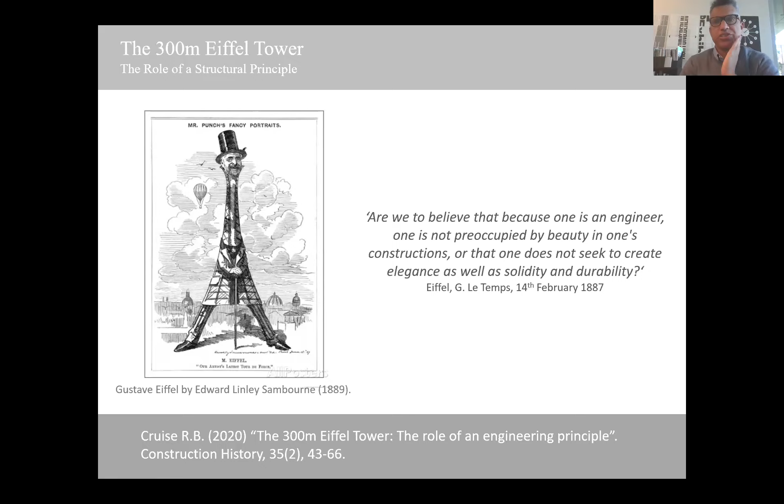Great, thank you, Rachel. That was really interesting. I want to relay a question from our chat, and it has to do with the use of iron versus steel.

Nick, who posed this question, mentions that Eiffel had used iron on previous structures, and justified it based on the idea that it was better in tension and compression than steel. Did you come across this in any of your work?

A little bit. Sorry, there's some fireworks going off in the background. It's bonfire night here, so apologies for that.

Yes, there was actually quite a conversation that Eiffel had with other engineers about why he wasn't going to use steel. I think the truth of it is he had built iron structures successfully up to that point, and that's what he understood. A lot of what you see coming out of these design processes is that he's building on prior knowledge and experience, because he's having to make assumptions since the knowledge isn't there yet. So you can feel it's a bit of security that he knows what this material is going to do, what it's capable of, even though with hindsight we can look back and say steel would have been more efficient.

Thanks. A question I have has to do with costs and the idea that maybe Eiffel wasn't motivated by reducing the amount of material used. His end design is much less efficient materially than the initial concept. Has that been part of your research, and do you wonder if that might play into some of the changes?